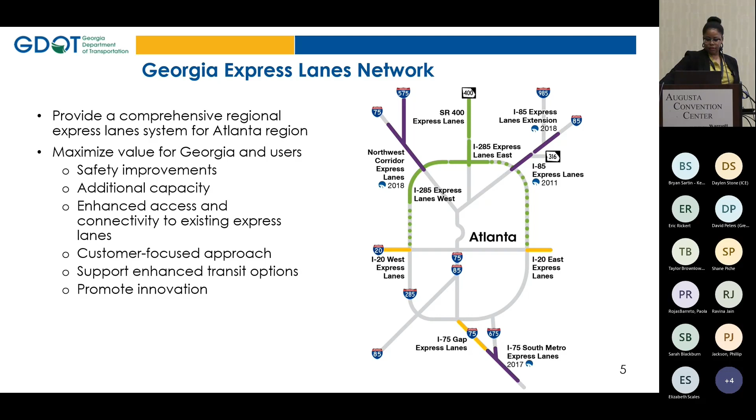So I-285 east will be built in 3 phases, and I-285 west will be built in 2 phases.

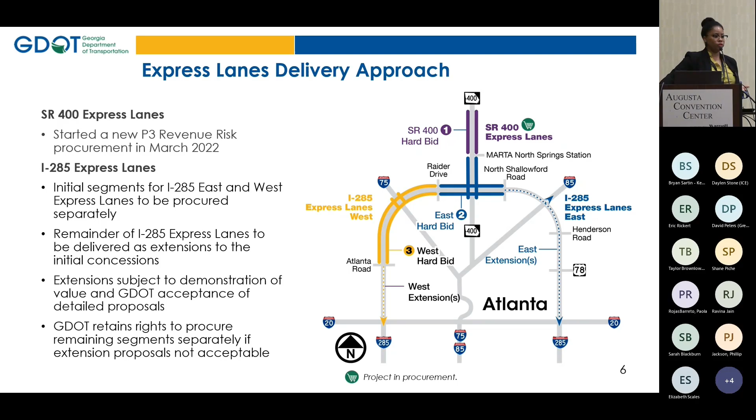The SR 400 Express Lanes project received an INFRA grant of $184 million in 2018. As part of the grant, the requirements are to begin construction within a reasonable amount of time. Because we restarted the procurement of SR 400 in order to fulfill the requirement of the INFRA grant, we advanced a portion of the project.

So we accelerated the construction of 3 overpass bridges, which I'll talk a little more about in terms of locations and status. That is considered phase 1. Phase 2 is the construction of the express lanes.

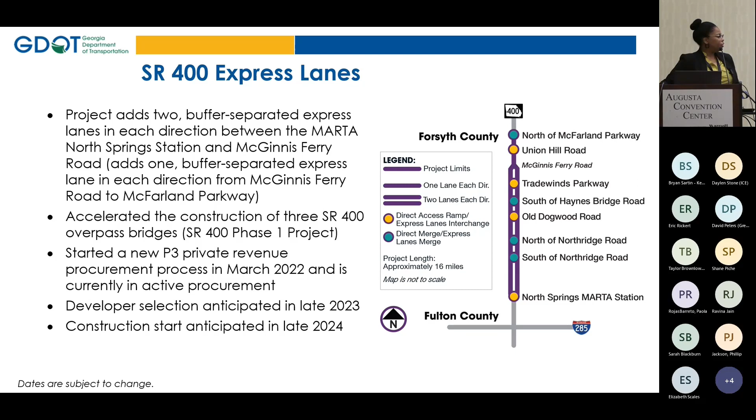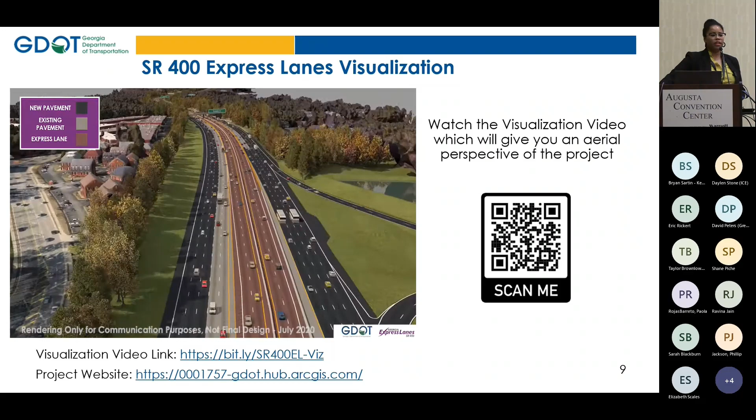We won't have time to go into the visualization, but if you go to the project website on the GDOT homepage, you'll be able to see the videos for I-285 and SR 400 express lanes.

Now back to the SR 400 phase 1 bridge replacements. There will be 3: one at Pitts Road, Roberts Drive, and Kimball Bridge Road. Pitts and Roberts detours are planned, and there will be stage construction for Kimball Bridge Road, so there's no detour at that location. The construction is underway.

We began clearing in late 2022. We're finalizing utility relocations, and staging equipment and signage for the upcoming work is underway. We anticipate substantial completion on these bridges in 2025.

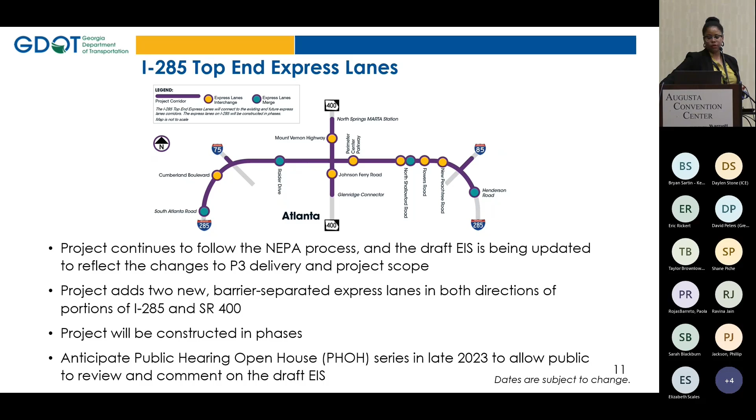Other dates we anticipate in terms of the procurement for the express lanes phase 1 and 2. As mentioned, SR 400 should be selected this year. I-285 East phase 1, we will start the procurement in late 23 or early 24 with a selection in late 24 or early 25. The I-285 express lanes phase 1 to begin in 2026 and a selection in 2027. The funding for the projects is included in the planning STIP documents.

Also, just wanted to let you know, this is the best information we have now. These dates are subject to change. It's still a lot of work we have to do to make these dates, but this is the best information we have at this time.

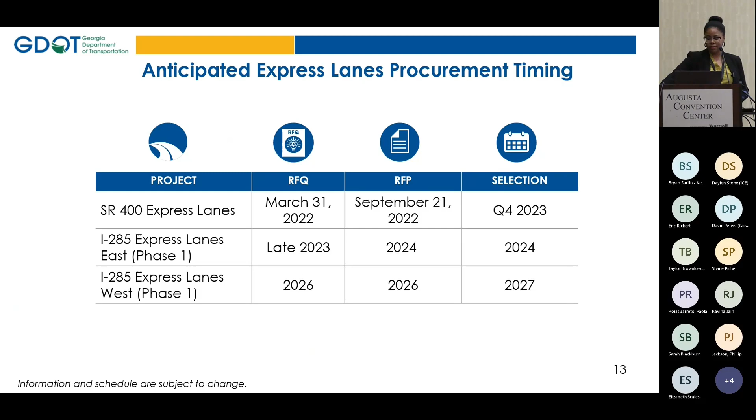So now I'll talk a little about the transit. As we mentioned before, when looking at the region, it's always been a discussion where should you do transit, extend MARTA, or add additional capacity? Well, with this project, we were able to include both. The Georgia Express lanes, by incorporating transit, are offering transit options that currently don't exist.

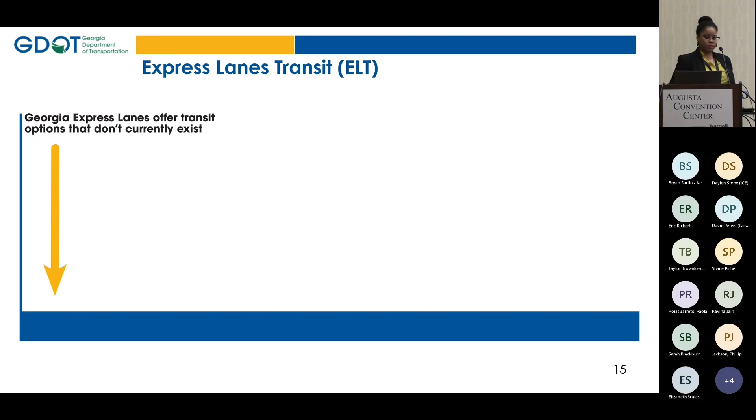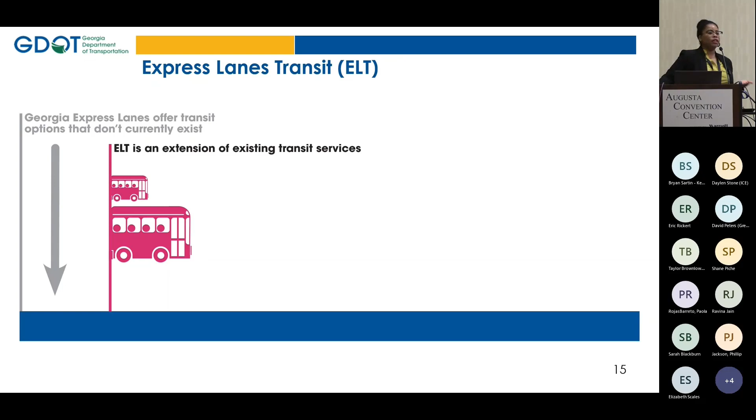The ELT is an extension of the existing transit services, meaning the buses and the systems are there, but now by including them in the express lanes, we're merging the two systems.

By doing this, it also provides the reliable and faster transit times for the transit users. It helps reduce vehicle emissions and improve air quality for you environmental tree huggers.

And I'm just kidding, I'm just kidding. It's right for all of us.

And it offers more time and attention for other activities if you are utilizing the transit services.

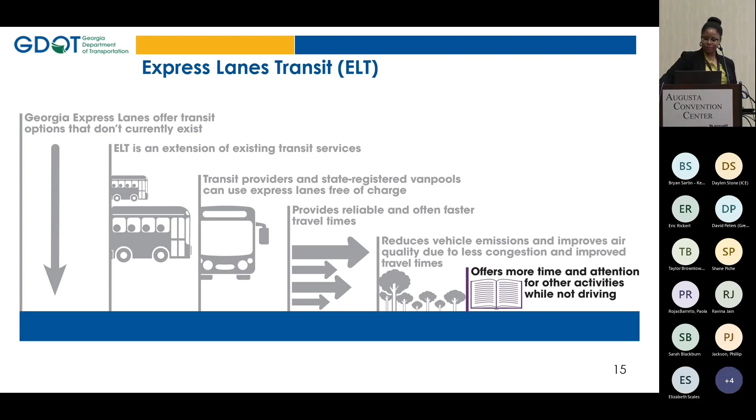If some of you live in the area, you may know MARTA didn't get that mega grant during this cycle, but they will reapply, and they are actively looking to secure funding to design and construct these stations. So we are continuing to coordinate with MARTA concerning the station designs.

We're also building into our contracts with the developer teams for them to include transit solutions in their proposals. These will be scored and weighted to determine the best value proposal. We're seeing these procurements are a game of inches, so it really helps to drive innovation when you tie performance metrics such as transit to contract.

And lastly, we have what we believe is a historic collaboration between the ATL, ARC, MARTA, and the 4 counties on the north end of the corridor. They got together and developed a plan, and we routed an MOU to focus really on transit for the area.

But I'm going to talk today about a new template that we have for design variances on existing roadways. And bear with me, Chris kind of made these, so I'm stealing his presentation a little bit.

We looked back at kind of what we've received over the years for design exceptions and variances, and Chris and Doug noticed that we have a peak that kind of coincides with the end of the calendar year. So loosely that may indicate that we occasionally get a bump as people head into FFPR trying to make the June let. I'm not sure that's fully the whole trend, but it may be contributing to this.

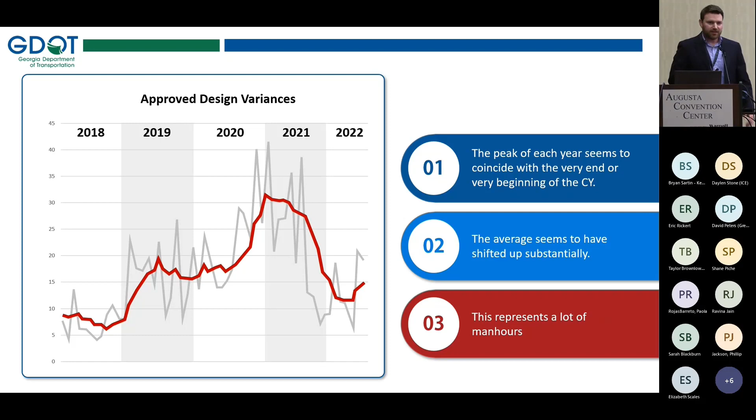So just don't wait till FFPR to do DEs and DVs is the point to that point. But the next thing is that we're also starting to see a greater average of DEs and DVs come in, thanks in no small part probably to MMIP. But this represents a lot of man hours for the design community as well as for us to review them. And so we've started to look at the

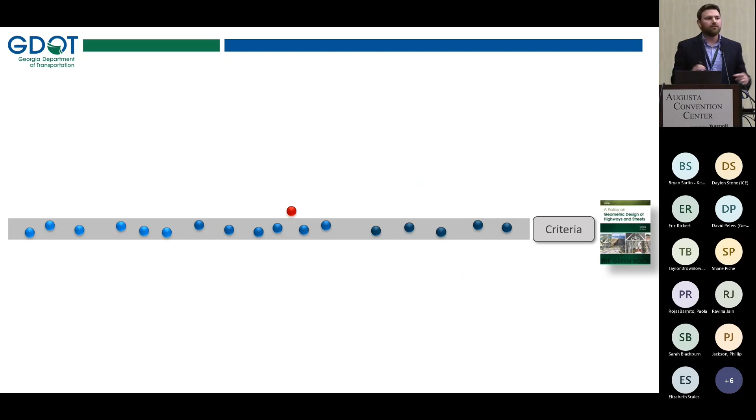criteria, and they're just a thin band of the things in the Green Book. But there are different project types. As those project types change, the window, for lack of a better term, for improvisation kind of grows a little bit, right? On a new construction, brand new road, there's no reason not to meet kind of everything, right? Because you have very few constraints, theoretically.

With reconstruction, you're a little more confined, but you're doing more to the roadway. You're changing it substantially. But then existing roads, you're staying on the road. You're not really changing it, and so there's less room to change, but there's also more performance that's sort of available historically for the roadway.

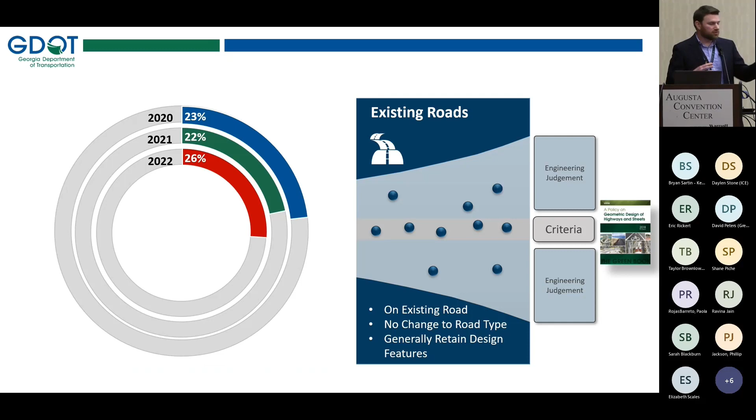So looking at that, about a fifth to a quarter of the projects, or of the design variances that we received over the last 3 years or so, have been on roadway projects that would count as on existing roadways. And so in looking at that and looking at

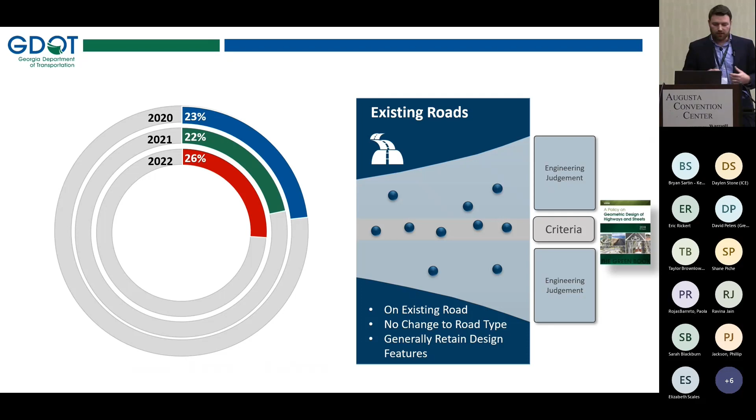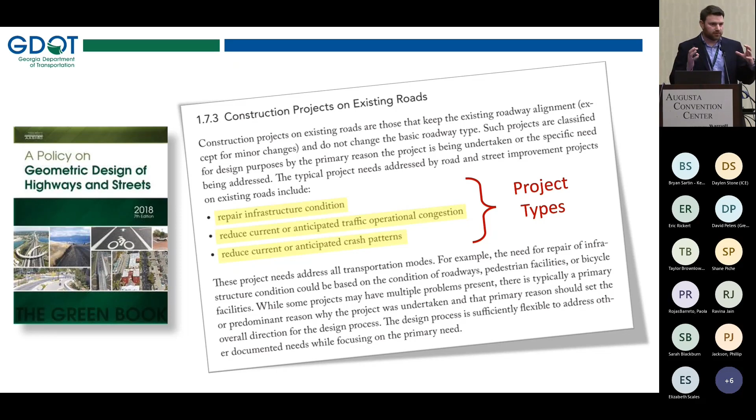1.7.3 in the Green Book, which kind of lays out your project types for existing roads, right? So you have repair infrastructure condition, reduce your current or anticipated traffic congestion and operational congestion, and reduce your current or anticipated crash patterns.

So those are your kind of project types that 1.7.3 focuses on. And then it says that the blue that's highlighted is just sort of a focus on the scope, right? Yes, there's multiple reasons often that you undertake a project, but there's usually one big goal and one big purpose. And so one of these three things should be the big goal or purpose when we're looking at projects on existing roads and defining projects on existing roads.

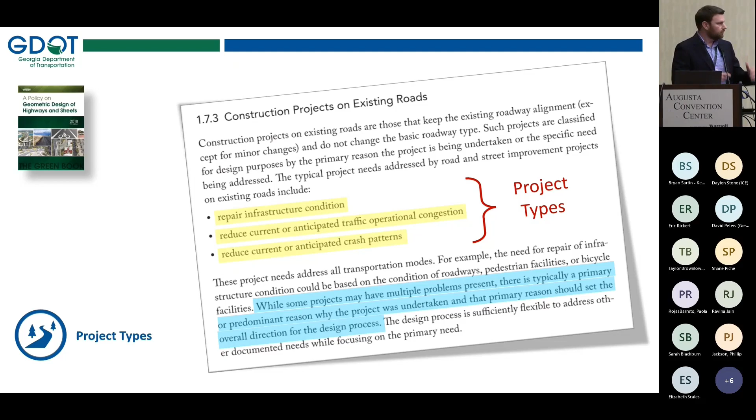And the next thing that's highlighted in red and in yellow are kind of inverses of one another. So the red is just saying that you should make improvements where you can, and the yellow is saying that oftentimes you can't make improvements on these type projects.

And so that kind of underscores sort of the next thing we were looking at with the new design exception variance or design variance template for existing roads, is that it's an existing geometric feature. All right, and then right up under there is that the feature is performing well. So can you document that it's performing well, right? And so those are the three things that 1.7.3 sort of points to for retaining an existing substandard feature.

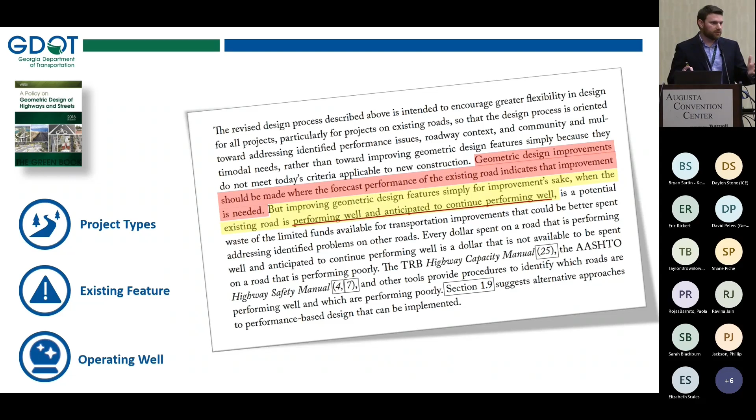Is it, well, first of all, is it existing, obviously? Then is it performing well? And if so, don't spend your money there, trying to fix what isn't broken.

So taking that and looking at the existing design variance template, we can start to remove some of the sections and streamline the template to look at what's more important to focus on: existing roads and retaining these substandard features.

So we lose the current and future traffic data section, we lose the alternatives considered section, and we lose the cost to meet the standard criteria and why the standard can't be met. That's because you don't need to do an alternatives analysis when you're saying this is fine as is. There's no alternative to consider—you're just proving that it's currently working.

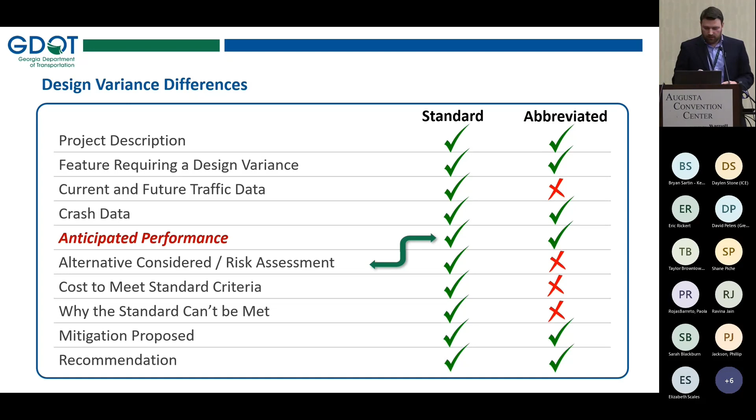But with that, we did add a section, anticipated performance, and your risk assessment slides up in there—that's what the arrow's for. So you've got to look at is it performing well. That's the catch of this whole thing, because if it's not, then you have a problem, obviously. But in doing that, we have the new template.

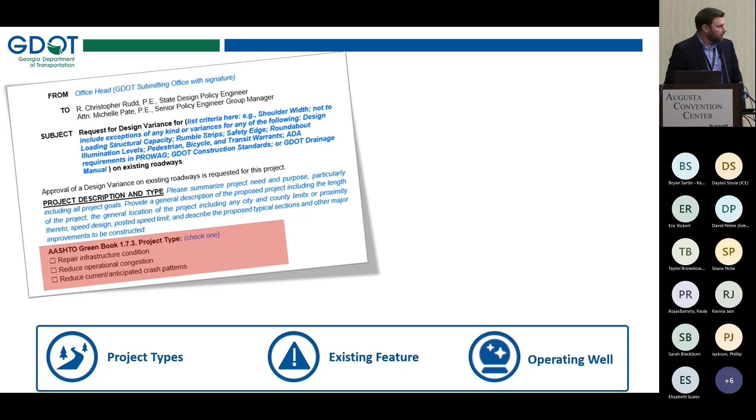It's out on roads. In the first little section you have some check boxes, and you have the three different project types that we discussed, and you pick which one your project proposes to do, or your project is scoped to do. Then at the end of the template, you're stating again—this is meant for you to check. This is more of a checklist. Is that the project type meets the requirements 1.7.3.

The existing condition will not be worsened, that it performs well today and should continue to perform well, and that you recommend it for retention as the engineer of record. So you'll check at least one in the project type, and you should be checking all the boxes there at the end. If you're not checking all the boxes, then this isn't the template for you—you need to start looking at alternatives and assessing why you couldn't do something else.

Now, another thing to note is this is a Green Book based variance, so it's geometric stuff—design speed, stopping sight distance, horizontal, everything but structural loading or structural capacity is available, at least on the FHWA controlling criteria side. On the GDOT standard criteria, you can't do it for rumble strips because that's not a geometric feature. You can't do it for safety edge, that's not a geometric feature. You can't do it for roundabout illumination levels, ped, bike, and transit warrants, the construction standards, and the drainage manual—those aren't geometric.

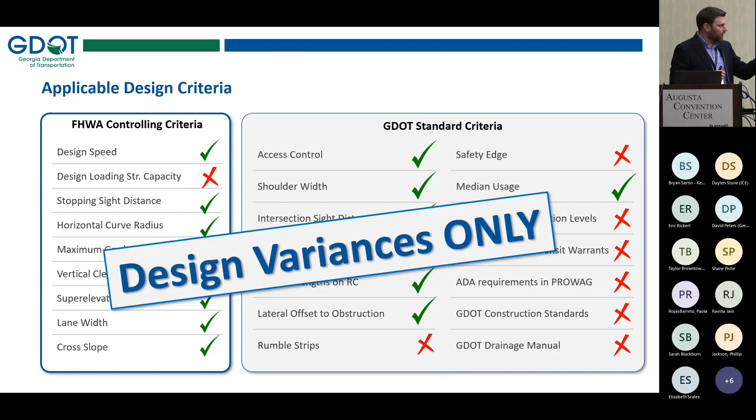Final note, this is for design variances only. FHWA is not bought into this at this time, so it's just the variances. So if it's an exception, you're going to go the full template route, and a lot of that is in the head. Let me go back just a little bit—right there under subject, it lists the things that you cannot use it for as a little additional help there.

So we rolled this out right before the summit in November, the GDOT summit, and we've collected a few frequently asked questions. I'll go through them real quick. My project meets one of the project types but shifts the alignment—can I use the abbreviated template? No, because the underlying assumption is that you're staying on the existing road.

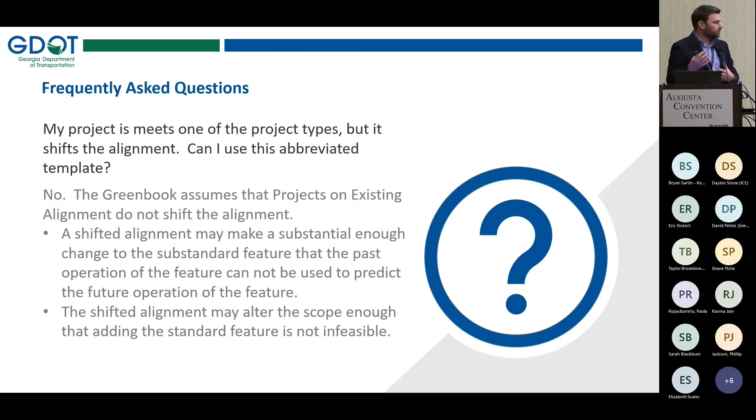That shift in alignment presents possibly the ability to address features. It also may worsen features if you have to make a curve tighter than it is today. So you kind of lose the one-to-one of the before and the after.

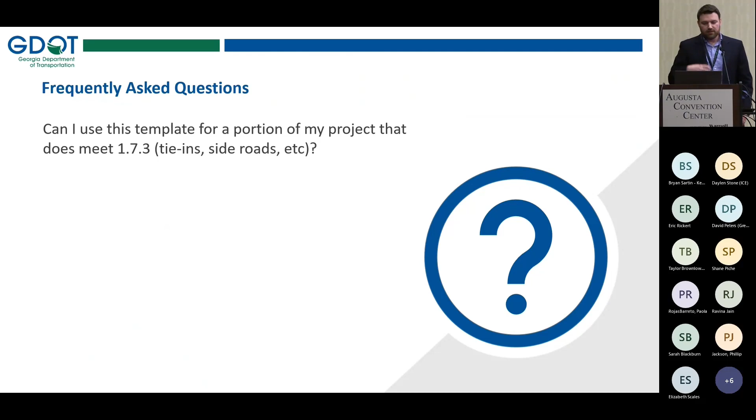Can I use the template for a portion of my project that does meet 1.7.3, like a tie-in or a side road, some small portion of an overall project? No, the Green Book is focused on the project type, so you've got the money and the focus. Now, I will say that doesn't mean that we don't think you could invoke 1.7.3 in your write-up of a full design variance or even a design exception. You just can't use the abbreviated template because with the amount of capital that's invested, you would want to do an alternatives analysis.

And then: my project meets 1.7.3, can I use this template for all design variances I may need on the project? As I stated a little bit before, no, you can only use it for those geometric features. So we've written the ones in the template that it cannot be used for—that should help. But there's a list again.

Design structure loading, rumble strips, safety edge, roundabout illumination, and the list goes on.

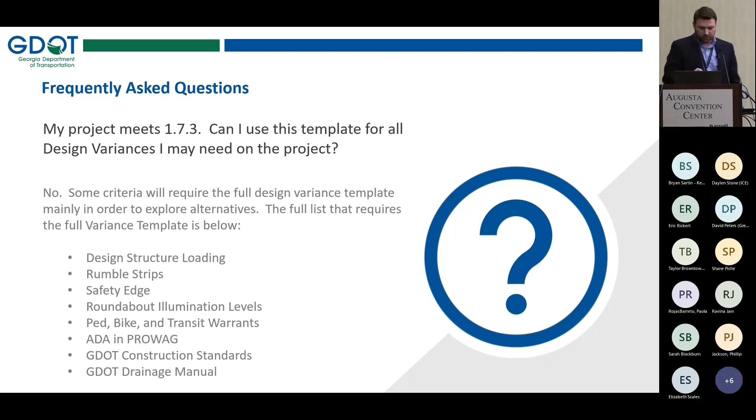Can I use this 1.7.3 template or the new template for design exceptions? The answer is no, you need to use the full exception or full template, because these are going to FHWA, and we're only doing this at a variance level right now.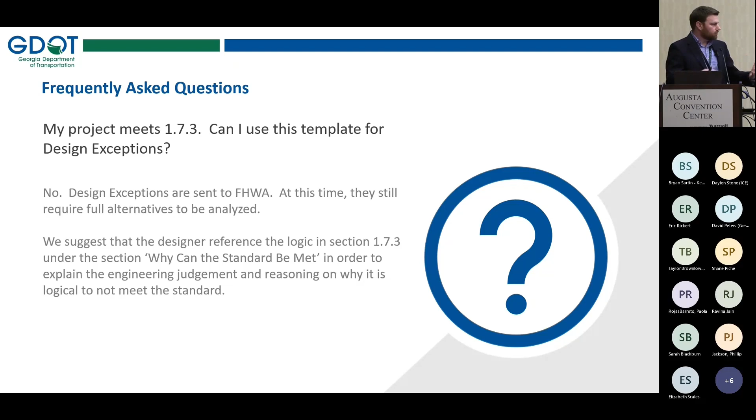Again, we suggest that you use the logic of 1.7.3 if it applies. If you're retaining something and you've got no problems with it, call on that, bring that up in the exception.

With that, I'm going to open it to questions, because this is new and I feel like we've gotten plenty of questions. Has anyone tried to use this yet? Question?

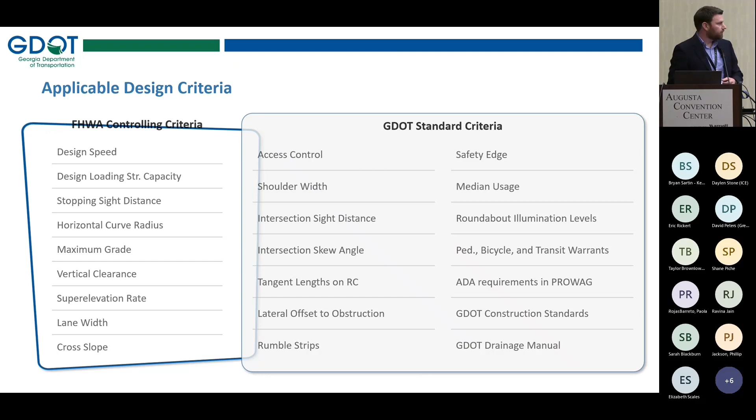So the question is, let me back up through all these. If you meet the 4 questions at the end, the 4 check boxes, but you don't meet one of the first 3 check boxes, should you still use the new template? The answer right now is no. I say right now, I don't see that changing, but just so I don't get caught on something in the future. Again, 1.7.3 is for projects on existing roads, so that's sort of the first condition. If you don't qualify as that, then you have to go the full template route. So, yes.

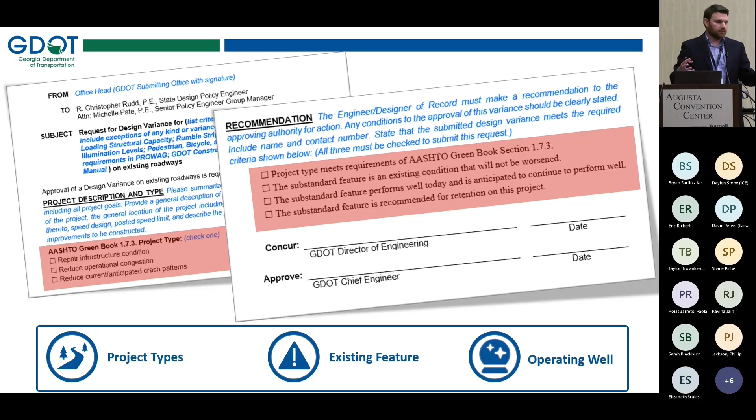Well, guardrail wouldn't be covered in this, right? Because guardrail isn't being provided as a geometric feature, it's a safety feature. If you look at the list, I think I forgot to say this: most of them are geometric, but things like rumble strips, safety edge, roundabout illumination levels, a lot of these are safety and not just geometric. The guardrail you would need to meet, you would need to do the full template for, because we want to look at alternatives and why we can't provide it.

Chapter 11 in the DPM addresses other project types, of which maintenance projects, specifically preventative maintenance projects, are a part. So there's some more latitude in Chapter 11 for the non-PDP style projects. That may apply.

Anything else? Thank you, Austin.

Next topic is project visualization, and our speaker is Andrew Poszich. Andrew is a PE, he's been with RS&H since 2014. He serves as the design integration lead for the infrastructure strategy, spent many years in the highway design group. He brings an in-depth understanding of transportation design, overall three-dimensional work, related core engineering.

Not a super formal presentation, guys, so if you have questions throughout, since this is the last slot, feel free to ask them as we're going along while they're on screen, so I'm not bouncing back and forth. So what is project visualization?

To me, visualization is the key to being able to better communicate our designs. That can be at the transportation level, the planning level, the construction level, in the field, RFIs, whatever your job is—the need to communicate and visualize what you're doing is essential.

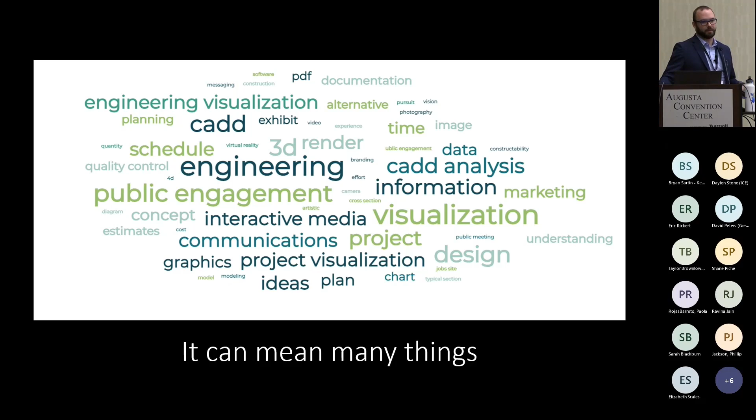That being said, visualization is a lot of different topics. There's a whole bunch of different routes we can go with this presentation, but I'm going to only focus on a few since I'm only with you for a short time today.

That's going to be engineering visualization, taking our 3D engineering designs and bringing them forward in a way that the public can understand. How can we bring that into CAD and get a better analysis of how we're doing our designs, using it as a design aid, not just an end product?

I'll touch on classic public engagement. It's been around forever, and we're always looking for new and improved public engagement strategies. I'll also talk about interactive media—how are we bringing cool things like 360 images or VR, AR? What's the future look like for the way we communicate and visualize projects?

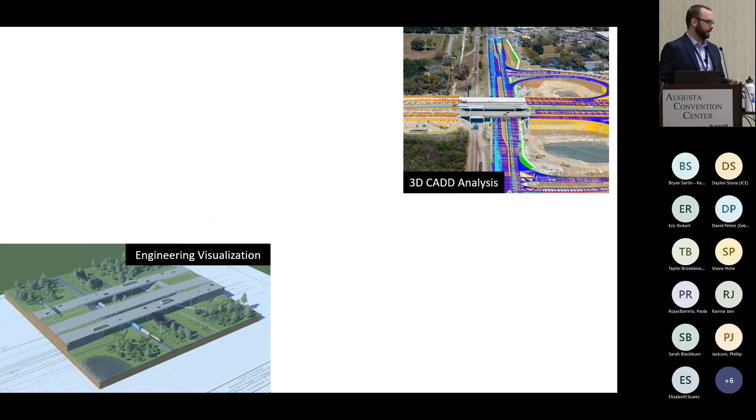So just to recap, main categories, we'll be getting the 3D CAD analysis, talking about how we're using these design softwares and technologies, bringing that forward through a lot of new tools that we've been given as an industry over the last couple of years. My bread and butter is Open Roads Designer. LumenRT is a great tool for that, but you also have InfraWorks on the Autodesk side that does a great job as well. How do we take those engineering concepts and bring them to the public?

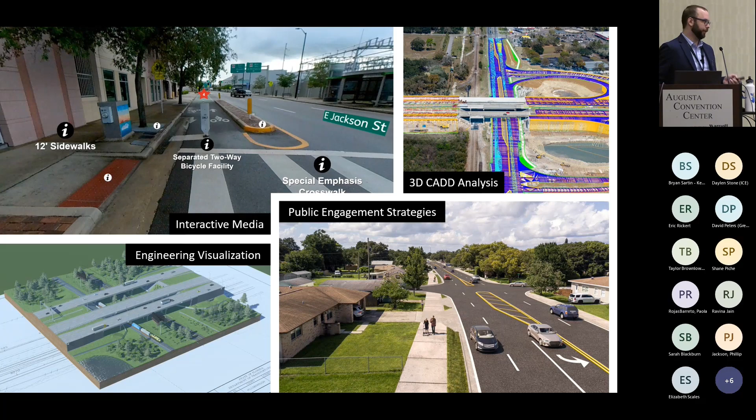PhotoSims is a great example of that, as well as maybe some interactive tools that aren't designed for engineers, but we've learned can create a pretty cool experience for your average user. Again, just to reiterate, communication is key. A nice photo sim can do wonders to help the average person not have to interpolate between a plan profile and cross-section sheet. So everything is using communication as a base point from here on out.

Now, specifically for 3D CADD analysis, it all starts with the native software. If your project team's using a 3D-first workflow, you are able to quickly generate visualization, whether it's in CAD or elsewhere. The idea of having this as a 3D focused design is you know that design's correct. You're not spending additional effort after the fact putting together a visualization or a 3D model. You're able to jump in and say, yes, this is what our engineers are doing. This is our latest design.

So you have a confidence that comes with that. It also easily allows you to understand context. If you have subs you're coordinating with, or certain stakeholders, different disciplines working together on this massive project, you're working within that same 3D workspace. Just makes sense. You don't have to guess or interpolate, or look at a spreadsheet somewhere, or find it buried in a PDF.

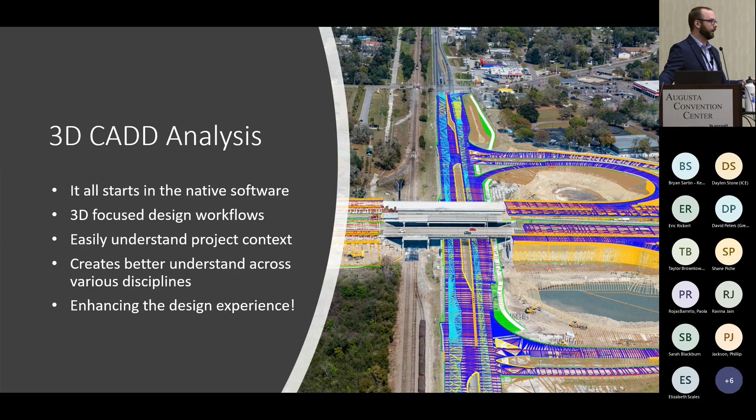It's right in your face in front of you, which allows for that improved coordination across disciplines. And to be honest, ever since doing 3D design, it's really just enhanced my design experience. I remember starting off out of school, searching through documents, trying to find out, calling people up on the phone, spending 20 minutes talking through what a pond layout looks like, what a drain structure is supposed to be. And I can just see it now in a 3D space. So it really helps enhance the way you work and collaborate with different members of your team.

So I'm going to go through a few different topics here. One recommendation I always make, if your team's looking to get into this realm, is to seek publicly available data. A lot of applications out there now have GIS databases. You can easily get that and bring it into your project. You have those 3D buildings, you have some terrain surfaces available. There's no longer this need to wait for official survey to get started when you have all of this available at your fingertips.

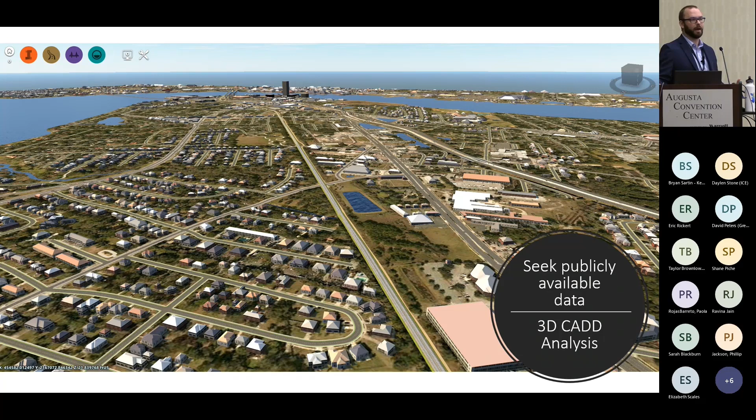You're able to embrace that and bring it in. Previous slide was InfraWorks. This is ConceptStation, two great tools, varying level of use depending on what you're doing, but you're able to make decisions quicker. You're able to get in and understand, and not have to coordinate or translate a typical section. Just being able to quickly make several design iterations and educated decisions, rather than waiting until a few months in before you start looking at vertical geometry.

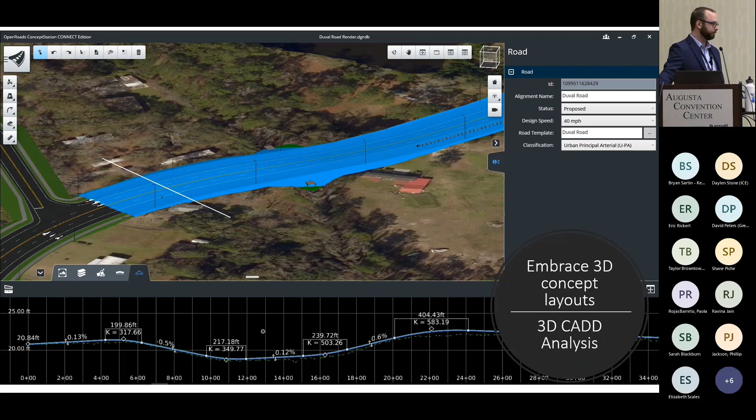Part of my favorite thing about doing this workflow is you're truly jumping in and looking at things from all dimensions from day one. So when you set your horizontal, you're immediately jumping in, looking at vertical, and you're able to dissect this workflow.

This is kind of where I want to poll the room, because this topic can be very on point for a lot of folks, and for some people, maybe this is completely missing the mark. So show of hands, how many people are involved in active design for construction projects? Okay, keep your hands up if you're working in 3D models. All right, those hands keep going up more and more as the months and years go on. So Frank and team, good job. Keep things going.

So this is not something new or distant. For many of you in the room, you're used to working at these different views. One thing I like to lean into, though, is the dynamic nature of these designs, being able to use a 3D model to make decisions for you.

It's a great tool. Just make sure you're taking advantage of it and you're not just isolating it off to that one person in your office that can do all the template work for you.

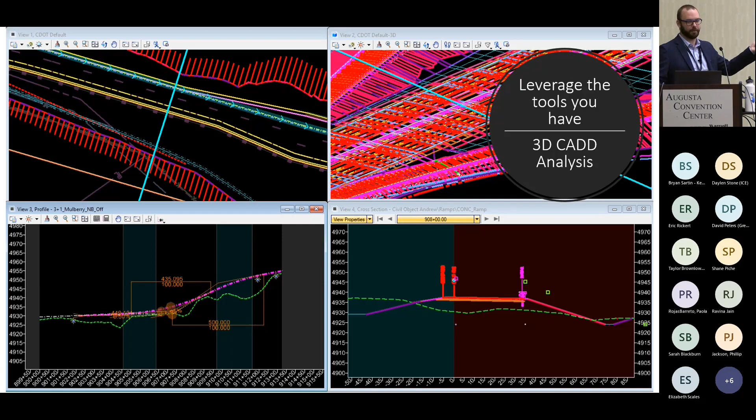Clash detection is hugely important, just visualizing what's going on underground. It's nothing crazy. If you have the 3D model, there's really no reason not to be running 3D clash detection to understand what's happening. You're really able to get those designs, and even if you're not using it in an official capacity, even though you're not signing and sealing models, you're able to see and communicate. Bring that into a meeting, have some dialogue around the utility clash, and navigate within that 3D space. It makes any meeting fly by that much more smoothly.

Something else I like to do is use my 3D model for active review and annotation. You're able to take the Geo workspace and do some pretty cool things with it, in any CAD environment. You can add auto labels, flow arrows that tell you different slopes of the ditch lines, and look at your culvert crossings, basically making sure your entire project is culminating into a cohesive design deliverable.

I use 3D for any of my QCs, even if I'm not signing and sealing the model. I always ask to see what the model looks like, because I'm assuming my project teams are jumping out ahead and making decisions based on how things are fitting in geometric space.

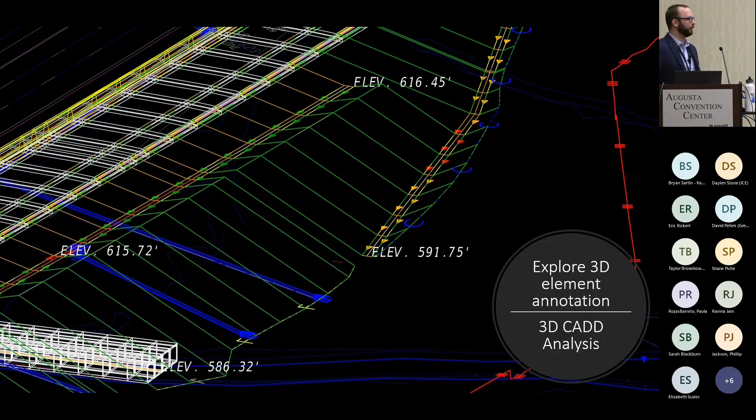So basically, short story, just use the tools you have. You can use them in unique different ways. It's not just a means to an end for cross sections. Please lean in and try to figure some things out.

Another cool thing we're doing is looking for ways to incorporate models into a delivery. Oftentimes we ask ourselves how do we demonstrate a certain design challenge? In this case, intersection sight distance triangles. Very simple from plan view, you're used to seeing it, but when you have complex geometry, sometimes looking at things in a third dimension makes it a little easier to understand.

We're actually able to, at a very high level, incorporate that into our plan delivery. Now this isn't policy, this isn't in guidelines, and if this offends someone by having it in 3D, I'd like to have the reason why that's the case. To me it helps with the messaging, and it's no additional effort or output. I just take a quick snap of a 3D analysis we're already running and include it in our design sheet.

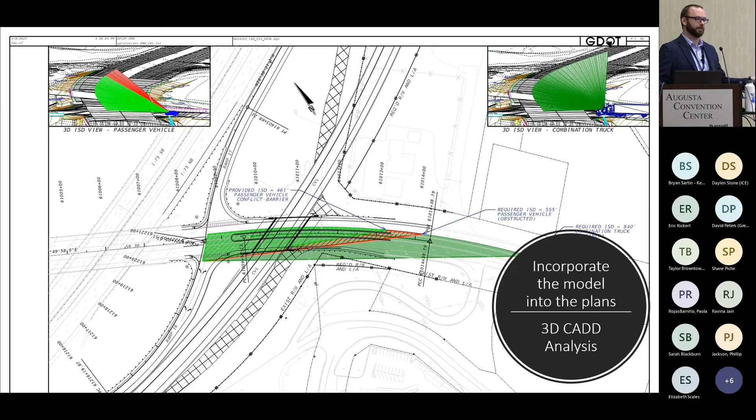Now this isn't a pretty picture. It's not going to be posted on some blog saying how great of a render it is, but it's using practical 3D visualization within an engineering workflow.

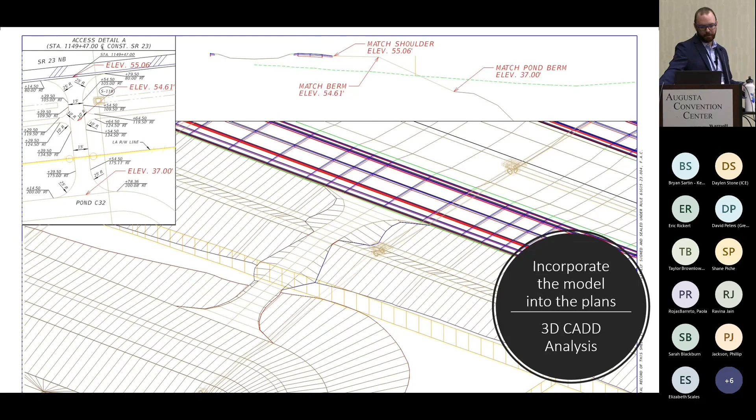Another thing—how many people in the room have been using reality meshes on their projects?

Ooh, not a single hand.

Reality meshes are a really cool tool, and they've become more accessible than ever. They're a great way to blend existing and proposed design data, giving you context to that model and letting you visualize what's happening around you. The way I like to see it is it's like bringing a high-res Google Earth 3D view into your modeling environment, where you can jump around and move through the model at different levels of quality.

You can get this from survey deliverables. A lot of surveyors are implementing photogrammetry now, and there are also common providers that use aerial data from satellites that you can pay to have shipped in. Even though it may not be survey accurate in all cases, there is still value in having that context, bringing it back to how designers are visualizing the project.

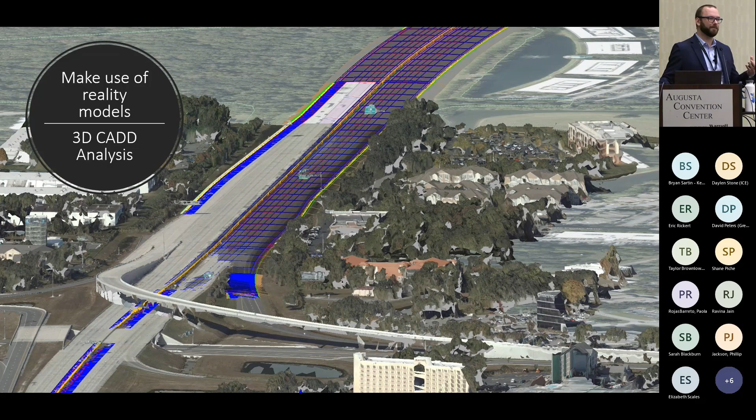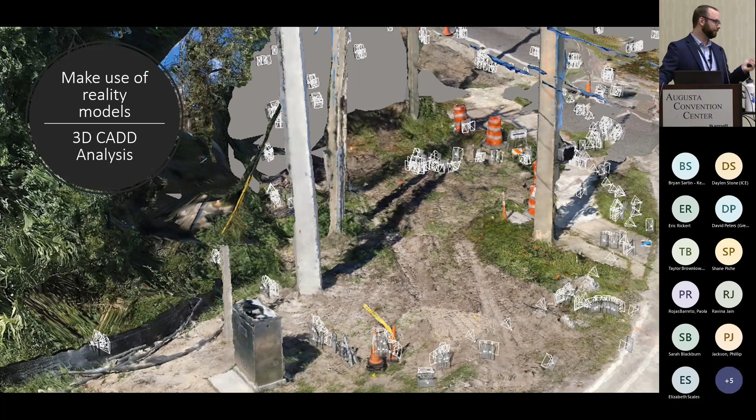Another great example is emergency response photogrammetry. You visualize this data and bring it back into the office, taking a field condition that was originally captured as a singular photo and loading it into your CAD model with full dimensions and full analysis to have a conversation. It's about how we communicate our design intent and how we really elevate the way we do business.

Having this 3D model in a meeting, I can talk through it point by point and see where all the damages are, versus going through several disjointed photos or looking at a plan layout on an aerial where the pier is still standing. This can be taken in real time and within a day be processed and used in a meeting context.

Shifting gears—that was the CAD level analysis. Now we're going a bit more into the pretty picture realm, like light public involvement. I always draw a line between what we do for engineering visualization and what our dedicated viz team does: what's the exposure? Is this going on a public website, or is it being used to help communicate a message?

If I'm comparing alternatives, engineering visualization is perfect—you're getting the point across and it's not going to live in longevity. But if I'm doing a banner for a website, or a render video for a high-profile project that needs more eyes on it, you're not going to want me doing that. I have a cool CAD model that works great for our purposes, but I'll ship it out to the experts for proper visualization.

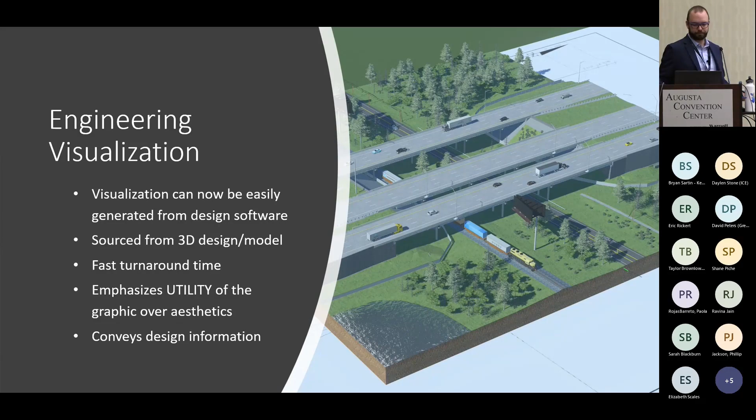Now, lean into the third dimension. If you're doing 3D design, most everyone's doing it already. It's a great tool, great purpose, but none of this is possible without jumping and starting with 3D design up front. If you don't have 3D design, you're basically recreating the wheel every time, and if you're doing a render, you're doing it from scratch. So this workflow does not necessarily apply to you.

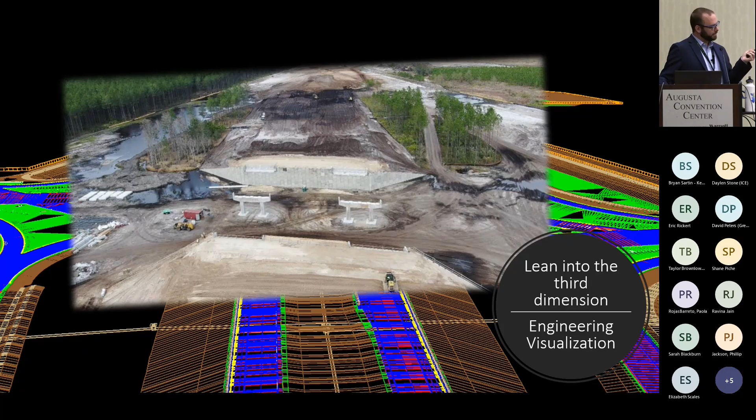Wish there was a render of this. There is not though. So moving on to the next one, there is.

CAD to render workflows: a 3D OpenRoads model. You've got some OpenBridge stuff, some utilities in here. We even went so far ahead as to put the signal poles in.

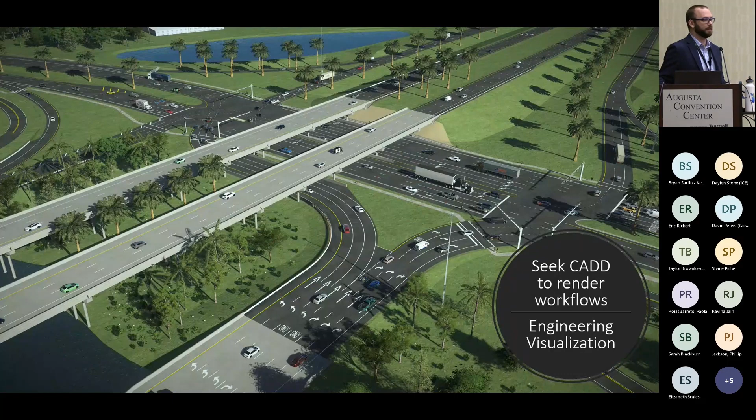Within really half a day, you're able to take that OpenRoads model, stencil some shapes, bring in some striping, add some cars, and now we have something we feel pretty proud of. You can get something better if you go to specialized visualization workflows, but this was out of CAD.

This is my design information. I can jump into this model and pull a measurement, pull a vertical clearance, and I know that vertical clearance is correct. I know that everything there is to the same design specifications I'm using to generate my plan set.

Just ease of use, too. 2D typical sections, right? Used to seeing it, varying levels. Everyone uses a typical section, but the public does not think of roads this way. I'm sure everyone's well aware.

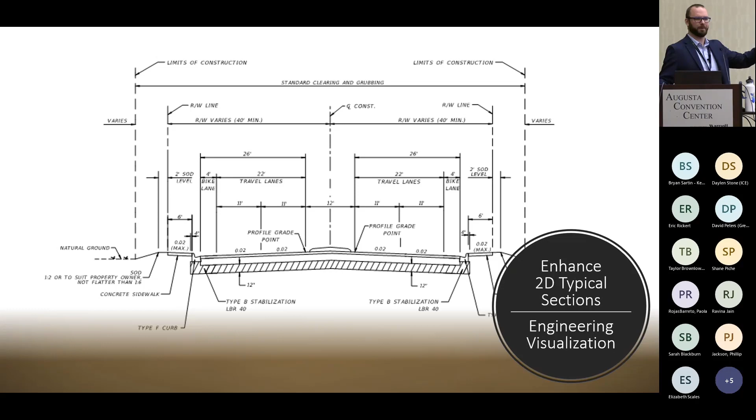Here we just take a 2D typical section, the same one you saw before, brought it into 3D, extruded it, threw on some cars in LumenRT, and within an hour or two, we have a render that tells a bit better of a story than that classic two-dimensional typical.

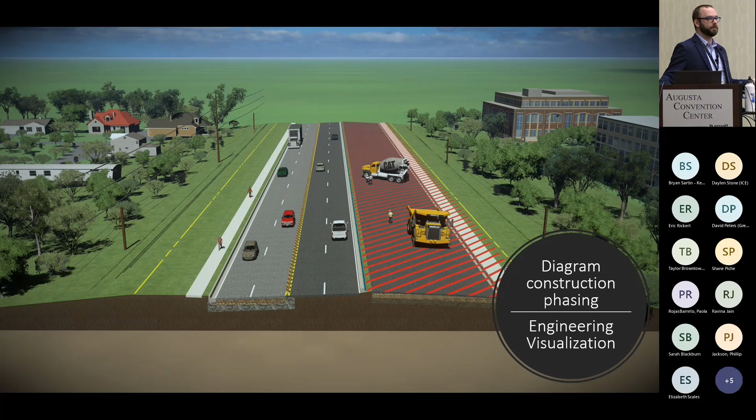MOT phasing, another great way - how do you maintain traffic? I'm going to tell a story that the public can understand, that stakeholders can understand. Way easier than a plan layout or some kind of typical section development. Again, utility, communications, messaging - not spending time making it perfect. It gets the point across, and it gives you additional context in the third dimension.

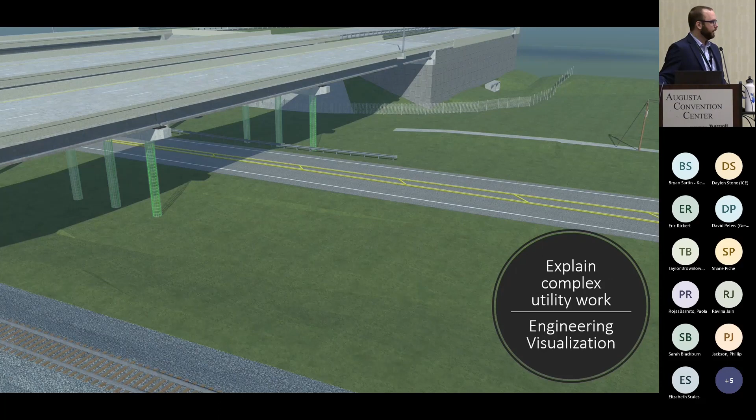You can do this with complex work too. Underground utilities, sure - pop it in LumenRT. I didn't even put trees in this one. I just buried it underground and took a picture of it.

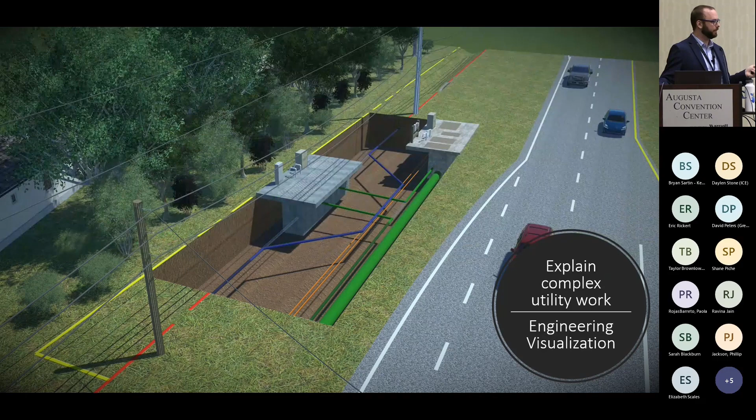This one has a little bit more detail to it. We had a utility sump relocation, showing what happens before and what that condition looks like afterwards. A couple hours of work in LumenRT - the 3D CAD was already there. Easy to do.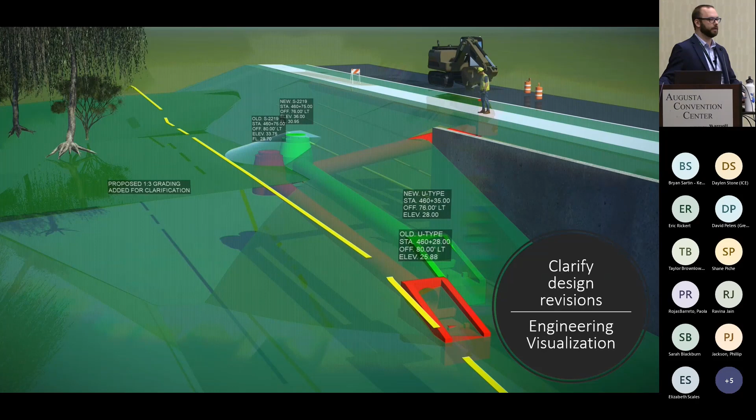Quick design context. Someone asks, what does this look like for my property? How many people go and say, oh, I'll give you a cross section to show you how tall that noise wall looks, or how tall the bridge is. Sure, it works, but really what they're looking for is: if I'm standing in my backyard, am I going to be this little guy dwarfed by the noise wall? The answer in this case is yes - that is a very tall noise wall, and sometimes you don't appreciate that until you see it in a 3D modeling perspective.

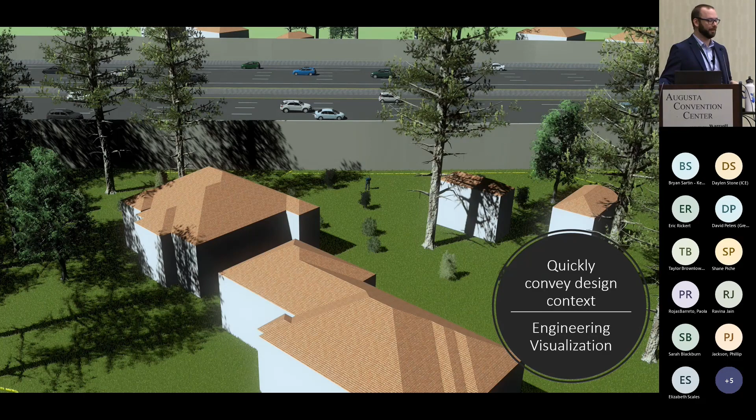I think I'm pretty good on time here, but I'm going to go ahead and keep on keeping on. Any questions thus far? Pick one or two if you had them.

All right, we'll keep on plowing forward then. Going back to public engagement strategies, this is where you ask the question: are engineering visualizations enough? Going to go to a Viz team? Each project's different, but essentially, no matter what the case is, you're looking to have clear communication. You want to be able to communicate your design changes, policies, alternatives, concepts. Whatever you're doing, communication needs are always going to be there.

But more importantly to me is I'm trying to show the public how they're going to interact with the facility. It's not just the design information. They don't necessarily care if the cross slope is meeting standard, but they want to know how it's going to look, from their house, how will it impact there, as well as hopefully getting buy-in, which is ultimately sometimes the goal, depending on the high-level nature of the project or not.

And then using these engagement strategies, a lot of the time it's a balance between budget and accessibility. So going through a few different examples of different variations and levels, just relate it back to projects you may have worked on in the past, and we'll go from there.

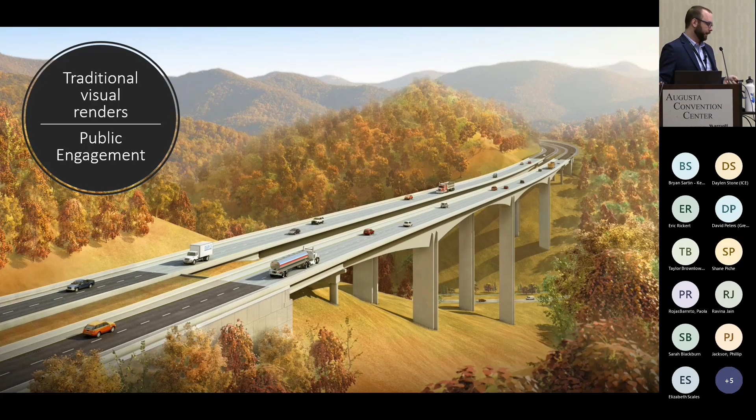Love this image, very beautiful, very pristine. I did not make it, but you have those needs for traditional visual renders at some point. So keep in mind, that's always a tool at your disposal, whether you sub it out, have a dedicated Viz team, or however you get there. There will always be a time and a need for those cover photos.

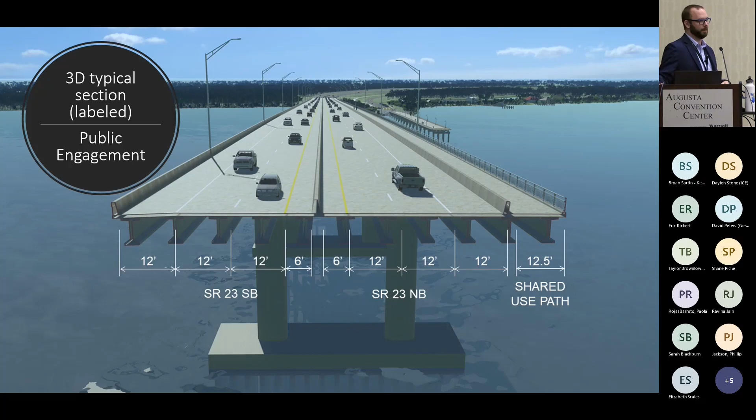However, I like the simple stuff. I have a 3D model already made. I can cut a bridge typical, generate that within 30 minutes if the model's already created.

Photo simulations, another great tool at your disposal. To me, they're honestly some of the easiest. Photo simulations are actually not that expensive to do if the 3D model's already there. Just find your drone shot, find whatever angle works for you, and incorporate it into your design.

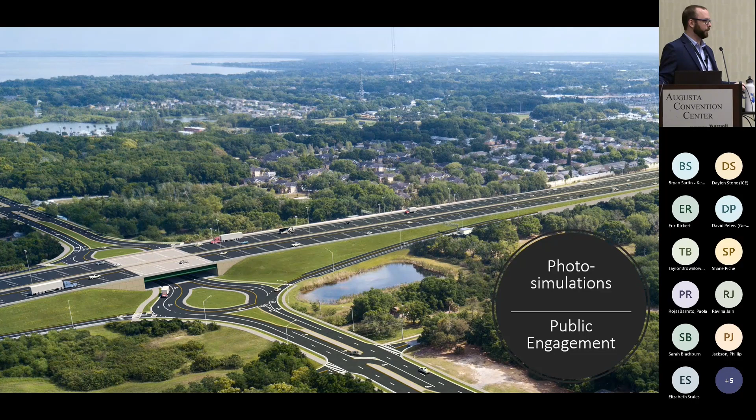I'll even take the lazy route. If I want to give context to my road, I'll just jump in Google or Street View. You can save out that Street View photo, drop a LumenRT typical section in, and with some very low-level photoshopping—which again, I'm no expert in, but I can mask and clip. Most, I think, Gen Zs out of college can do that using their phones now.

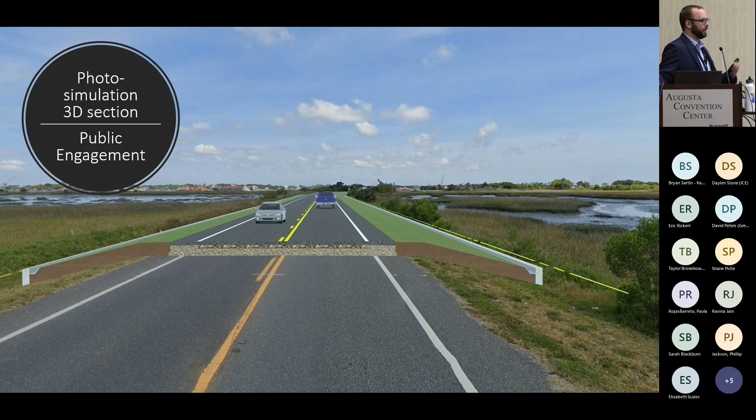But as you go through, it's a great way to demonstrate someone driving the road, what are you going to experience as you experience it?

Simple can be effective. So this is something that to some may look like a large visualization effort. To us, this is a lazy solution to a very simple problem. We had one property owner that really wanted to know what was happening. They lived here, and they had a new cul-de-sac, rightfully so. You used to have a road that went through, now you have your private cul-de-sac. To me, that's a huge property value bonus, but hey, we'll see how that goes.

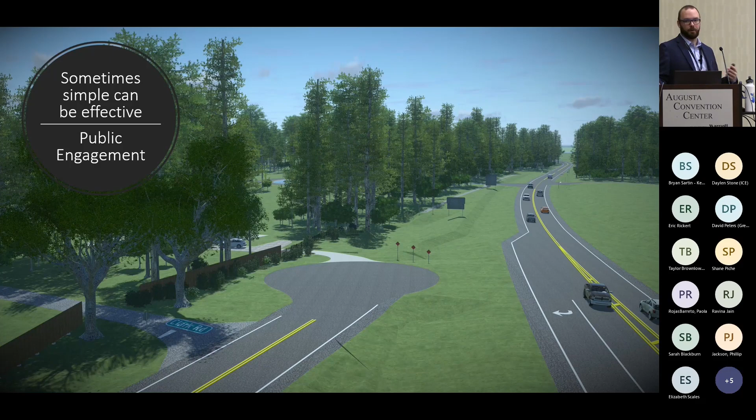But coming through, we had a terrain surface, so your DTM, your triangles, LandXML file, however you get it. We took some 2D shapes and we draped them over the surface. We didn't really have a full built out 3D model for this one. And within probably about a day, day and a half, we were able to go in, kind of somewhat recreate his property and then take different angles to kind of show him, hey, yes, this project's going to actually be an improvement for you. You're going to have less vehicles driving past your house. And we were able to get the buy-in from the property owner in question.

Another thing I like to do is incorporate into existing content. You kind of saw an example of those 3D PDFs earlier, of just including a CAD render. But if I have a roll plot at a public meeting or for a proposal or whatever I'm doing, I have the model anyways, I might as well showcase it and use it as a tool for explanation. Even if we are working with other trained professionals in industry, it's always helpful to kind of add that additional layer of quality of life improvement. You can show them what you're talking about. There's no mistranslation or misunderstanding or room for interpreting it differently.

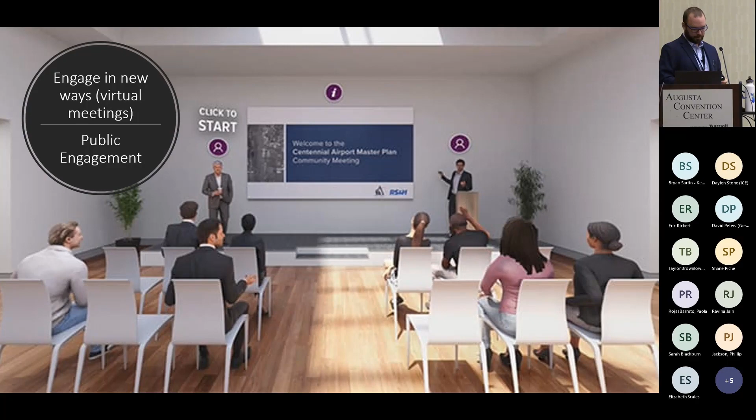Shout out to the earlier presentation on virtual meetings and reviews, there is actually a great use of this. You're able to incorporate everything you've seen thus far into a virtual meeting in order to get people the ability to click around, visualize it at their own pace, and interact with your content. I'm not going to spend too much time on that though.

We'll jump over to interactive media, try to catch up on some time here. I have the saying: interactivity drives engagement. That is true. The more people can interact with your content, the longer time they will spend with that content.

It encourages users to spend more time digesting information. It's great for broader educational purposes too. Think not just project-specific information, but also as an agency tool to help roll out new initiatives. In this case, we did a Complete Streets website that was interactive, giving people the chance to explore a complete street on their own. The underlying principle is if you make things complicated, people aren't going to use it.

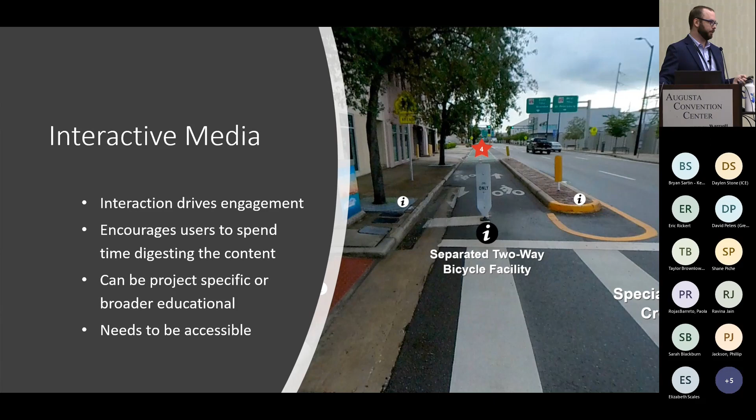Whatever you do has to be accessible to the average user so you can take it with you as you move forward. I have a slide on AR, VR, XR, MR, all the cool things that I am not going to talk about. There's plenty of people out there with presentations on how cool the future is going to be. As much of a proponent of VR as I am, I have my own headset, but I think we're still a few years out from that becoming mainstream, though there are some use cases. If you're interested, feel free to look those up. We're using them as a company too, but it's not something I think everyone needs on every project just yet.

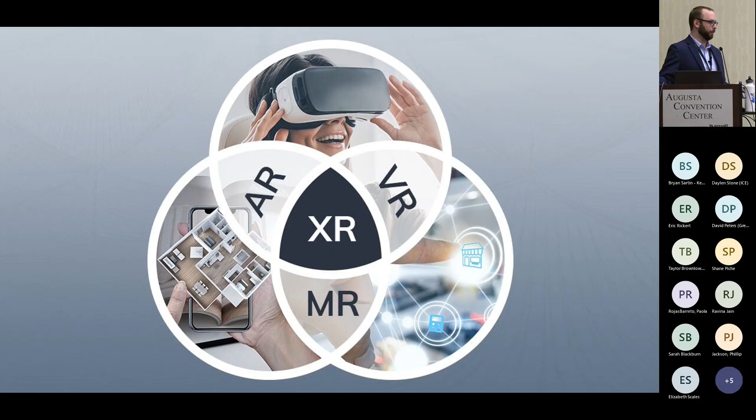That being said, I do have a few examples here. To be honest, I'm not sure how the Wi-Fi or internet's going to work, so I'm just going to do a high-level overview, and then we'll open it up for questions since I consolidated this presentation down a little.

Great tool. If you've done 2D KMZs, good news, it's basically the exact same process for 3D. You just need to be in a 3D file and you can export your model. Google Earth has some size limitations, so you can't do every single part of the project, or maybe you're just doing a shell of the project without as much detail. It's a great way to pull it up in a meeting, sharing with someone who doesn't have CAD, letting them jump in, pull it up in Google Earth, and interact with the design. You can even jump down to Street View, which is kind of cool in its own regard.